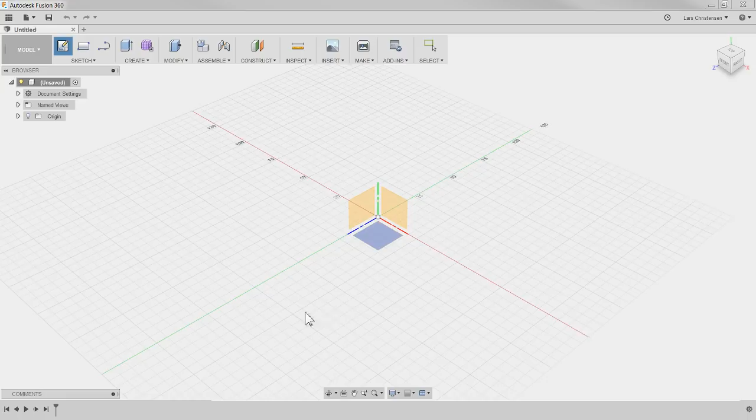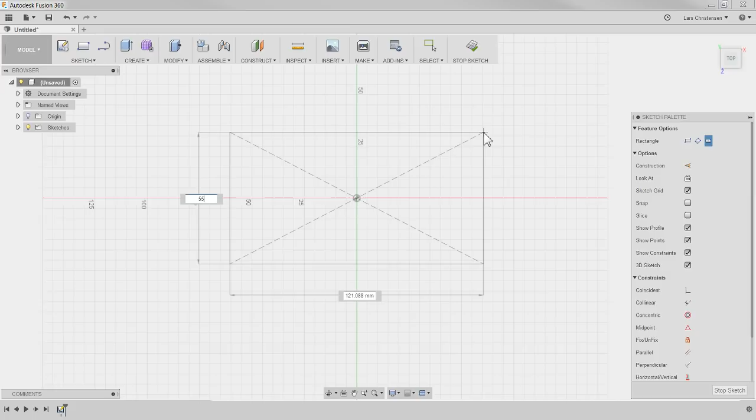So if I go up here and I start a new sketch, I'm going to show a lot in this, so just remember you can rewind and watch more. If I open a sketch on the top plane here, I'm just going to hit the S key and do a center rectangle, and I'm going to place the height and width of this vanity. We're going to do it in millimeters, so we're going to make it 550 wide. I'm going to hit tab, that's going to get me over to the width of it, I'm going to make it 1000 in width. So we kind of made a pretty big rectangle right there, right?

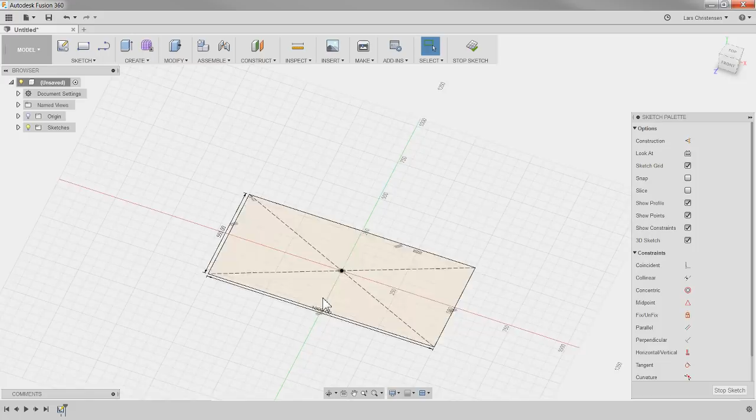So this is kind of like the bottom of the cabinet. Now, with the bottom of the cabinet here kind of drawn up, we could draw up the top of the cabinet. So I'm going to use the offset plane, I'm going to select that top plane, and I'm going to make it 550 tall. Okay, so I made a sketch that had our first rectangle, now we offset the plane here, got this plane. I'm going to right-click, create a sketch on that.

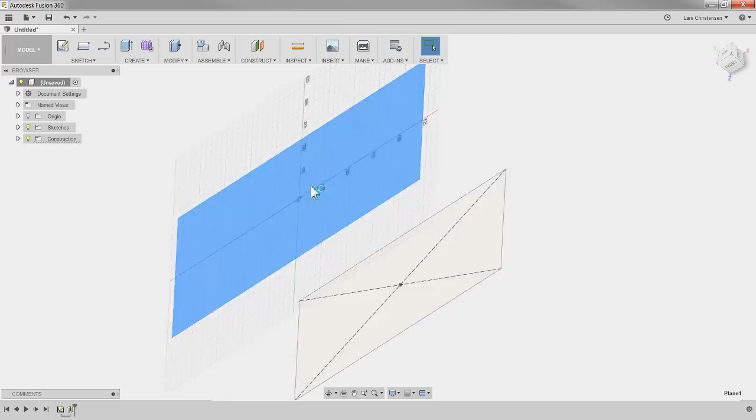And then, remember, we can use that project function, hopefully you hadn't forgotten that from last year. P for project, P for project. And I'm going to select these 4 edges here of our first rectangle, so I'm going to hit OK. And when I spin, right, now you can kind of see this here.

And by the way, this is not isometric, don't forget that you can right-click here, or it's not in perspective - right-click here, perspective with ortho faces. That's what I normally have. So now we kind of see the bottom, we see the top.

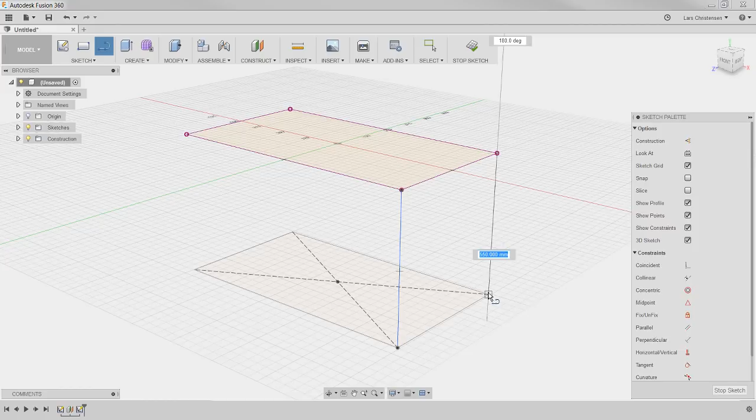Now, if you do want to connect these to kind of make it look somewhat like if you were sketching it up on paper, don't forget, if you turn on 3D sketches over here in this normal sketch dialog, hit L for line, we can actually draw up the sides of this cabinet. Now it starts looking a little bit like what I would be drawing up if I was trying to sketch up a cabinet for somebody, right?

Like if one of you guys came and said, hey, draw something up on a piece of paper, I probably would draw something up like this view right here. So this is kind of like the shape of the cabinet here.

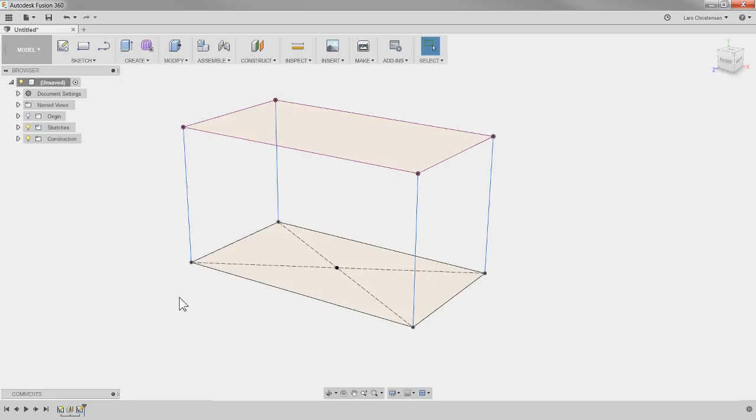Now notice I'm in a standard part file, I haven't done anything over here yet. I'm going to continue laying out this cabinet as I would if I was drawing it up on a piece of paper. Next I want to put in a little door here and a couple of drawers. If I turn my origin on, you can see that's sitting in the center there. We have a couple of different options for how we could get a plane out here we can sketch on.

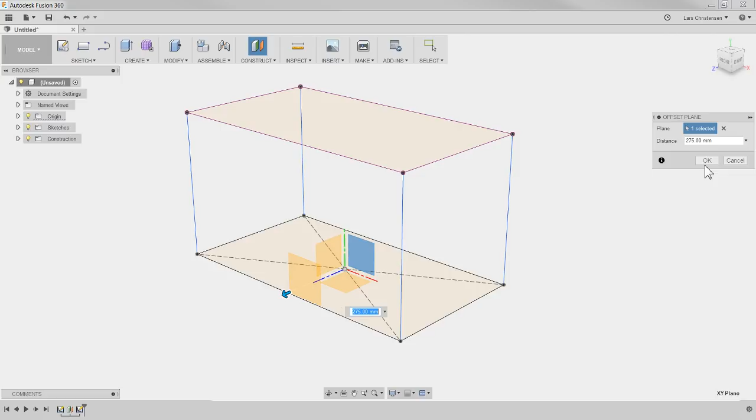One would be to offset a plane, select here, and do the math, whatever that is. But here's one of these tricks: you can also go over here and say measure, measure from that plane right there to that line, and it will put the plane right where that intersection is. Hit measure, measure from the original plane to that edge, and you'll get that plane to that spot. You could also go up to construction and do plane through two edges, selecting the two blue edges. That would have been fine too.

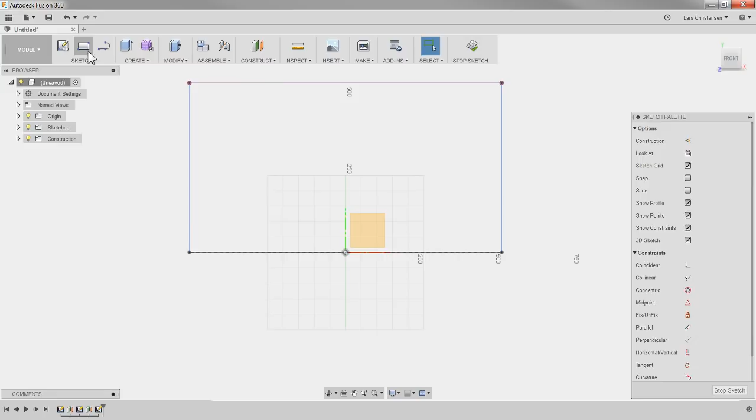But now we have a plane right here we can draw on. So let's start another sketch. Right click, new sketch, it's going to go normal to. First I'm just going to sketch a door, like that.

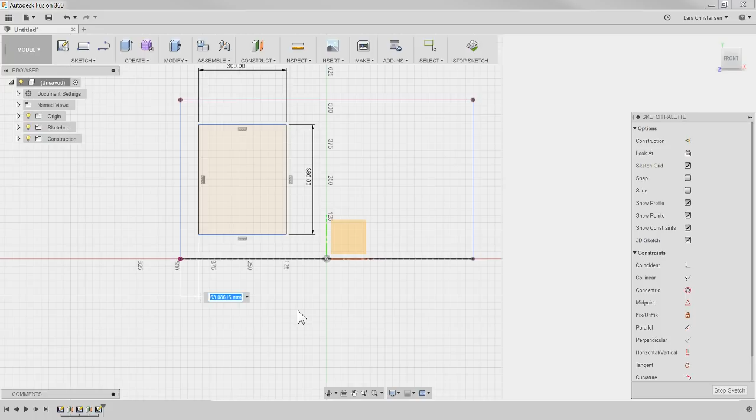Let's put some dimensions on it. I'm going to make it maybe 300 wide, and let's make it 380 tall, just making the numbers up, right? Then we can put some distance from here to this intersection, 75 maybe. And then I want to place it height-wise, we got to fully define it, right?

So we can go in here. Now what is this value? We made it 550 tall minus 380 divided... well, we can't just type that in, right? Don't forget you can do math in here. 550 minus the 380 we made at the gate, close the bracket, and divide that by 2. Now that was 85, place that in the center. Don't forget you can do that. So now that is fully defined.

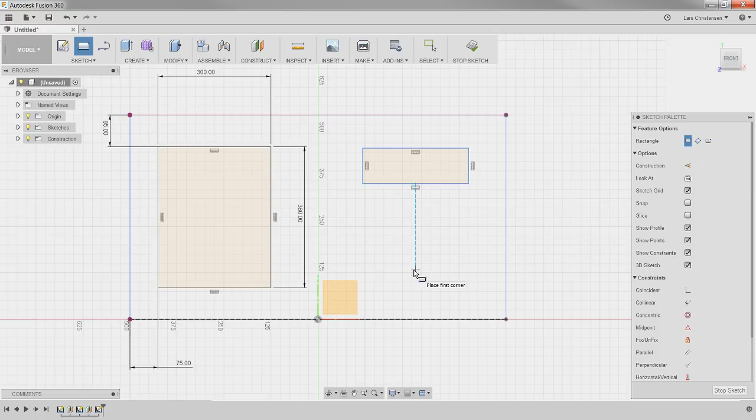Let's create the drawers, go in here, kind of sketch those up. Now these could absolutely be patterned, that may be good. I'm going to do a collinear between here and here because I know I want those to be in the same line. Let's make it 100, let's make it 300 like we did the width of that. And then let's also place this out from here to here.

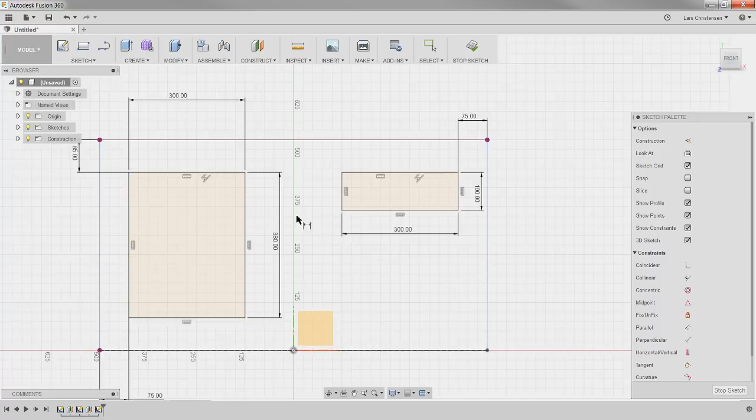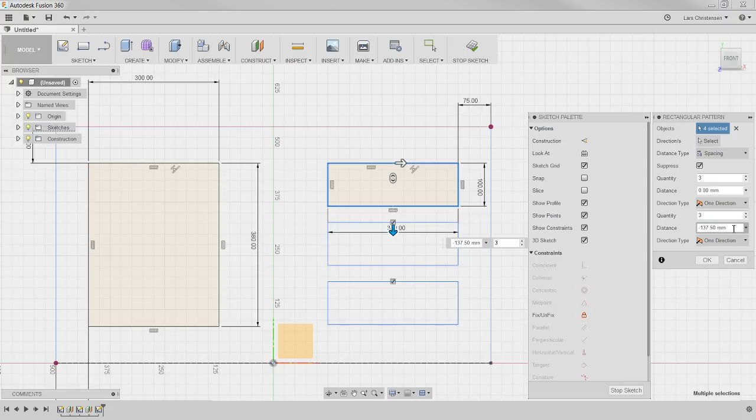75. Then we could choose to use the sketch pattern under sketch and just select those 3 here, or the 4 edges. So now we get those down there. I like to use spacing, and we want 3 of them, and that's fine. Let's make it 137.5 between them maybe. Okay, hit OK. So what we have now, I'm going to end this sketch.

Turn the origin off. What we have right now, drawn up in a couple of different sketches, all in this unsaved document, one document, is kind of my paper drawing.

Okay, so I see a couple of people have some issues. Yeah, well, I'm not the only one, huh? Why two clicks at the end of the line? I'm drawing, two clicks at the end will just end the line. So if I sketch something and double click, it'll end the line. Okay, I hope you guys restart a web browser and your stream is back. I hope we don't, I'm going to get Google Chrome working by tomorrow for sure. Right now I'm just rolling along with Internet Explorer.

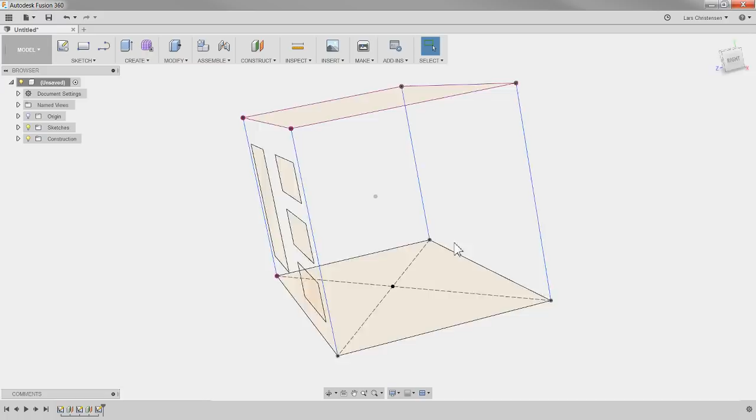Okay, so this is kind of like our paper sketch that you would draw up if you were doing it on a pad of paper. Now the cool thing about this is we can totally now start converting this into models. And this is a really great way to design things like this.

Now, we've talked about this before, but I'm not expecting everybody to be watching every live stream. Now we want to break it into actual components. Right now we just have a bunch of sketches inside of one file. We could continue doing bodies as we've done before, but we want to break it into components, right?

The cabinet is going to be a component, the door that opens up is going to be a component, the drawer is going to be a component. So what I'm going to do is go up here and right click and say new component. And as soon as I do that, you'll see that our icon up here becomes like an assembly icon. Now, here is an important thing.

Name features using slow left click. I'm going to call this one cabinet, because that's what it's going to be, the first one. You will see the cabinet we just created has a little fisheye turned on there.

There's nothing in here right now. If I go back to our top here and turn that fisheye on, that's where the sketch we just created, those three sketches, live. Layout sketch is what I call this, layout sketching, skeleton sketching, master modeling, whatever you want to call it.

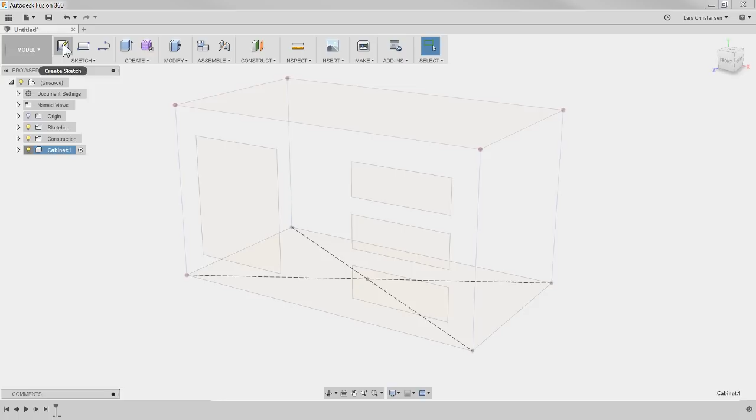So in that cabinet file, I don't have anything right now, so I am going to start a sketch on the same plane we started our original sketch on. Then I'm going to hit P for project.

Now I'm borrowing the edges from that first sketch we created. I'm going to click right here and borrow those 4 edges. I'm going to go one step further, and hit OK. So now in that sketch, I just have those 4 edges.

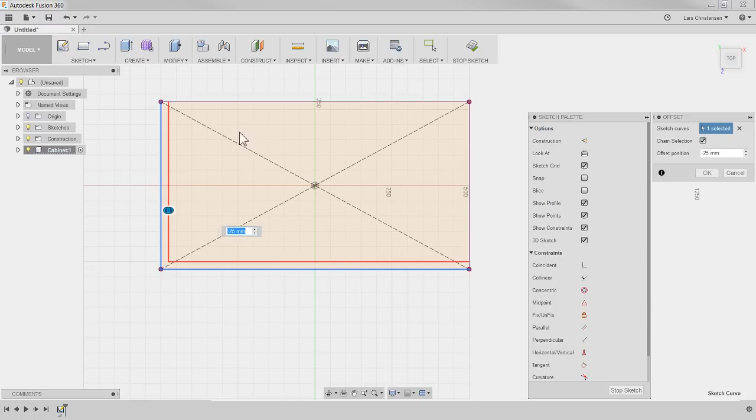I'm actually going to hit O for offset, and I am going to be able to create the thickness of the walls of the cabinet. Let's go in here, now let me just rotate it around.

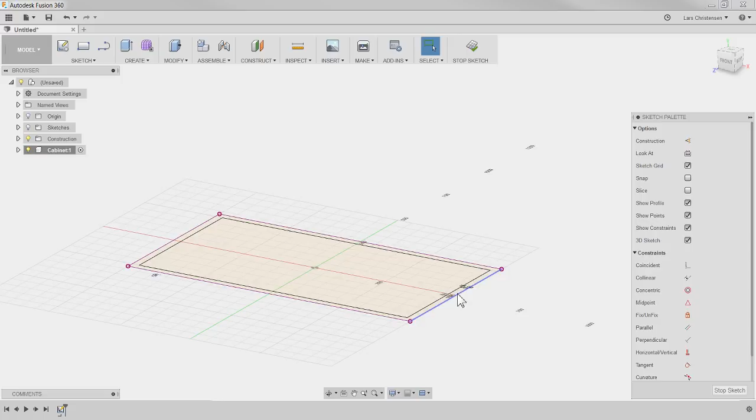Okay, hit OK. So we can still see kind of like the shadow of our master sketch. That one is sitting up here, we can turn that off. So in the cabinet sketch right now, we just have the projected 4 edges and the offset. I hope this makes sense.

Now we can go ahead and extrude that out. So hit Q and extrude. Just going to make sure we select that edge there, right? And we can give that a height.

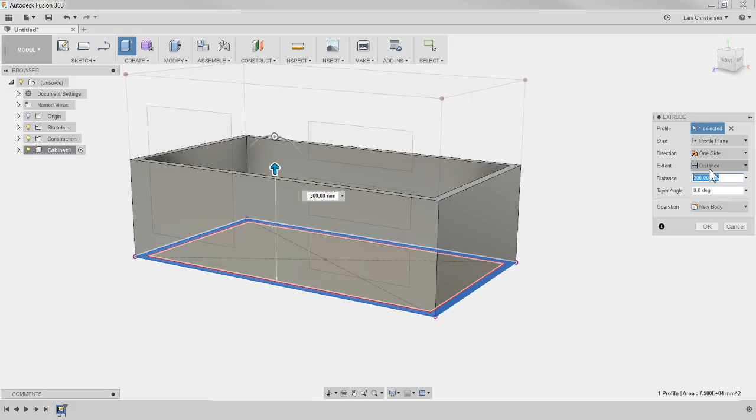Now you remember that I said the height was going to be 550 before, but you could actually go up here and say 'to object', and then select that endpoint right up there. Okay, so that means that now, I'm just going to hit OK.

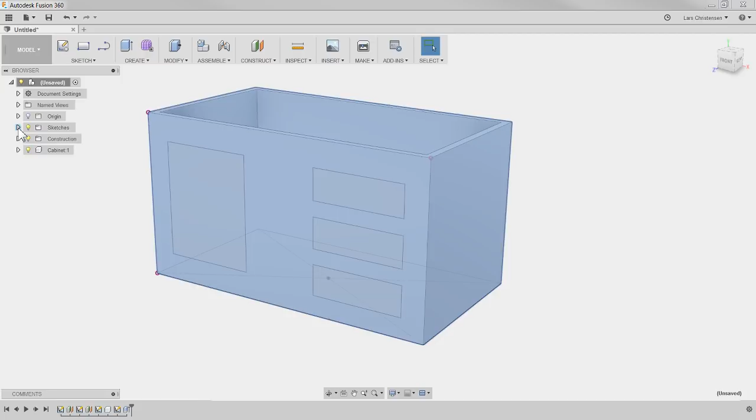We don't have the holes yet for our drawers and anything. But this cabinet right here is totally driven by that first sketch, or the first series of sketches we created. Let me just turn them back on, these first sketches in here.

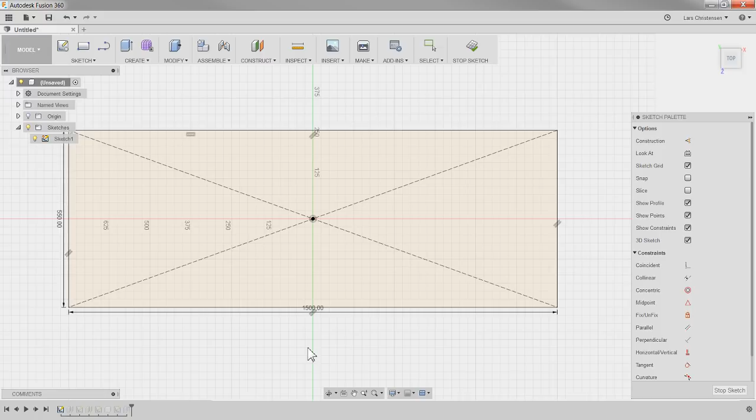What I mean by that is if I go into our first sketch, the very first sketch we created, and change this 1000 to 1500 and hit OK, our cabinet became 1500. And if we go in and change that first plane we created in the beginning to 800, the cabinet becomes 800.

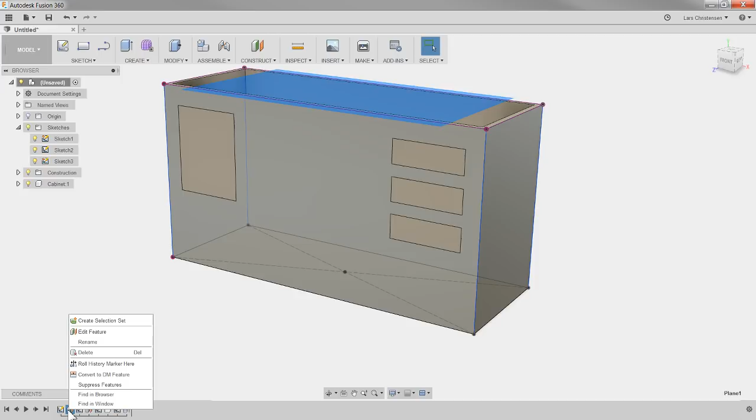I want to talk more about this on the live streams. I want to repeat this: this is what parametric modeling and design kind of means in terms of working with it, that I can change a set of dimensions and other things kind of follow along.

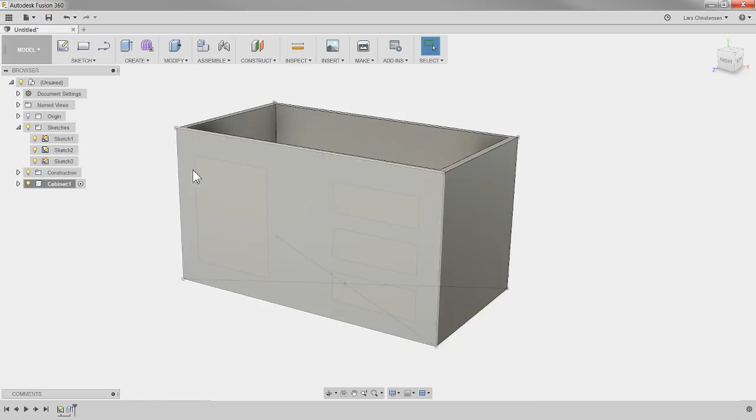Create a sketch, and I can hit P for project, and I can now borrow those other edges we saw before for these different cutouts, for the door and for the rough out for the drawers. Okay, so I've selected all those.

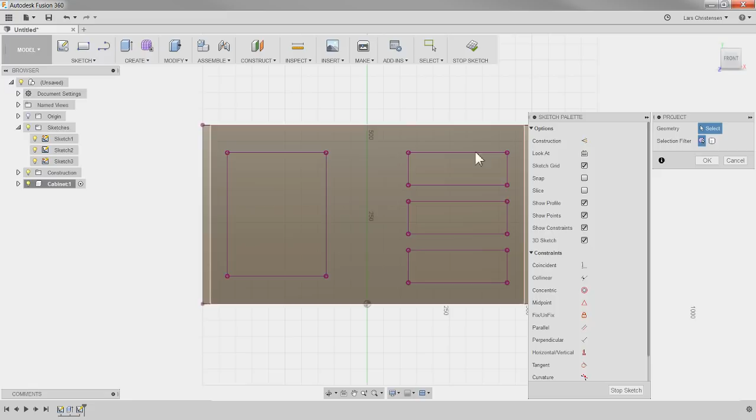Then we can hit Q and select those. And again, I want to cut. If you go that way, it becomes a solid. I'm going to go the other way, it's going to be a cutout.

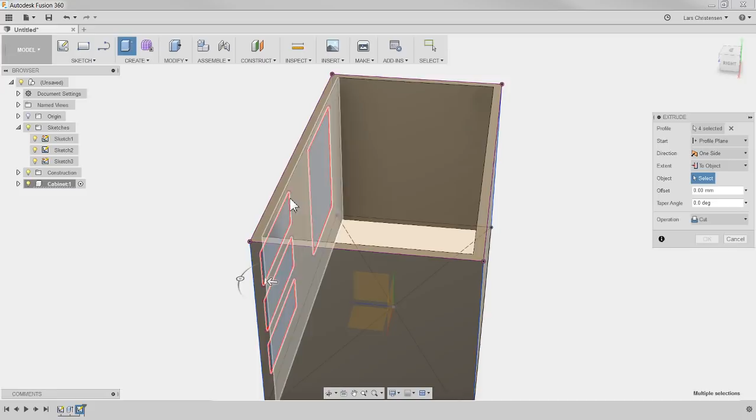Of course, I don't just want to leave it at some weird distance. I'm going to say 'up to object' and select the back edge, the back side of the cabinet. Okay, so that means that now if we went back to the first sketch in this cabinet and changed the offset value, the thickness, everything will follow along.

So just like this, we have created our first component in this one here. Now let's just move on.

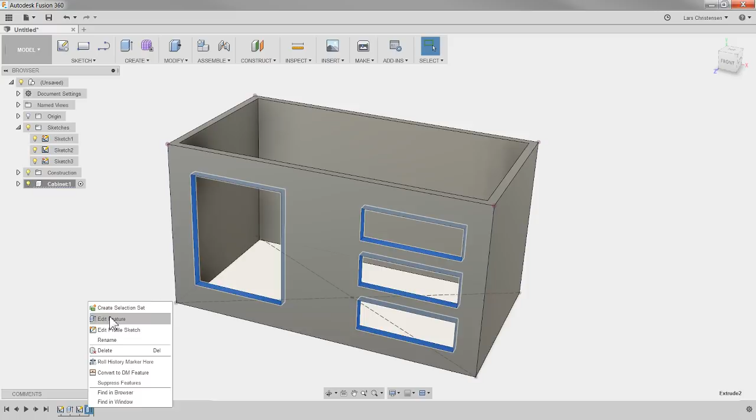How did you select the other borders and apply the same thickness? I literally just selected them all within that one command. If I go in and hit edit, you'll see I had four selected. I didn't control-select, I just click, click, click, click. If I hit the little X up here, I select that area, that area, that area, that area - just one left click per item.

Okay, I'm going to move on here because I want to show you some pretty cool stuff. So this is kind of like the foundation of our cabinet, and we've already established that this is controlled by our sketches here, our skeleton we created that is sitting up under the first one. Now we need more objects here.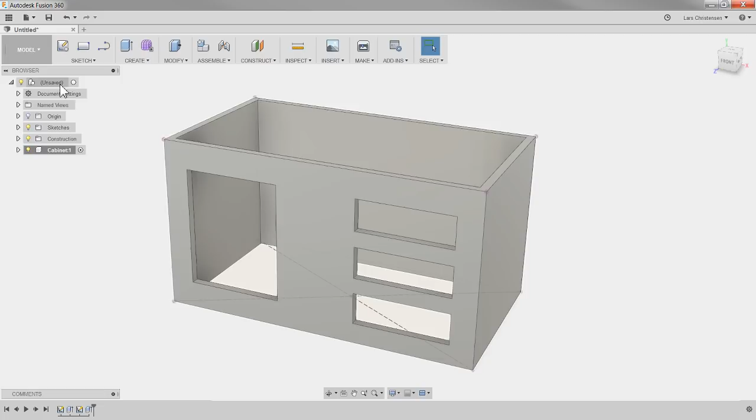Let's create a door for this - is that what you call it, a door? I don't know. So I'm going to right click up on our top component here, and say new component. I'm going to slow left-click, that's how we can rename it. If you don't get in the habit of renaming this stuff, you just get lost, right? So this is the door.

Now again, just like with the cabinet, there's nothing in this file right now. I just created it. There's nothing - see down here in the history line?

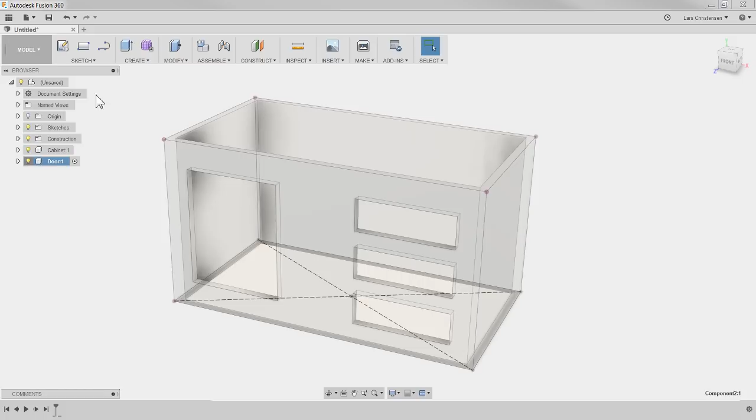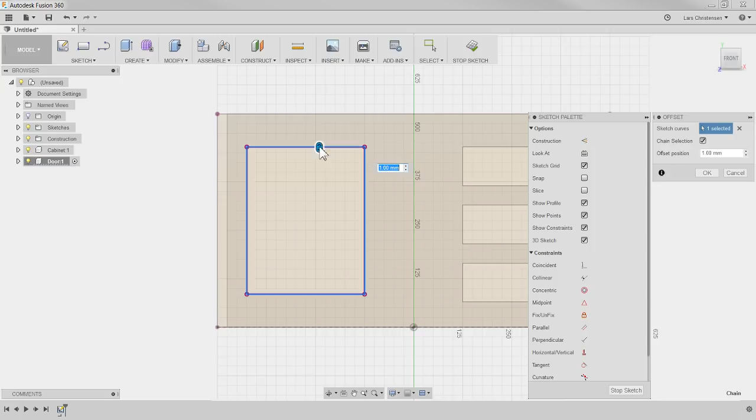Completely flat, right? Now I'm going to do what we did before. I'm going to open a new sketch, start on that face, and again borrow - I like to say steal - those edges we already have established here. But the door is going to be bigger than this, so I'm going to hit O for offset, select this, and offset it out a little bit. Whatever, right? So now it's a little bit bigger here.

Q, and now if I select these two areas here, I can add some thickness to this. So now if I go back up and turn this on, we now have the cabinet, we have the door right here, and still remember everything is controlled by these sketches.

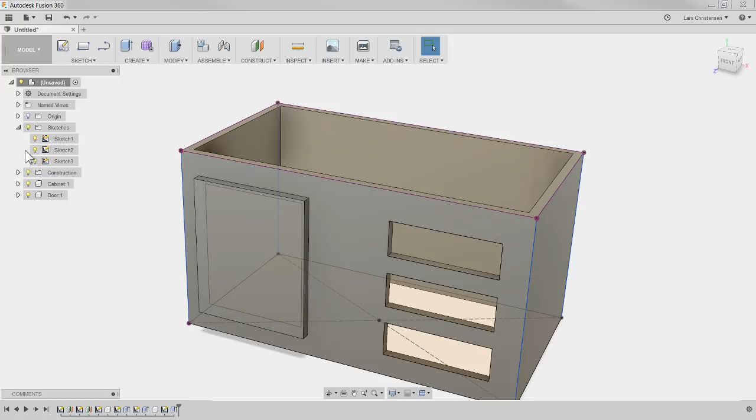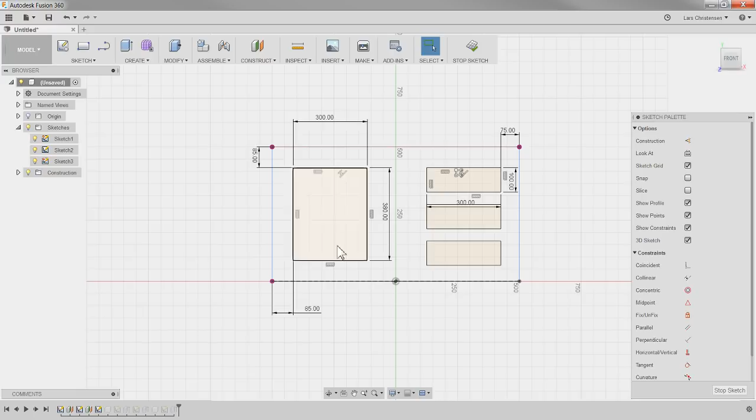So if we decided we were going to go into the first sketch and change the distance of the location - if we decided we were going to make this one 85 of this, move that over a little bit because the customer calls you up and says we're going to change that - because everything else is derived on that, it moves along. All the other things follow because it follows that. Okay, so I hope that kind of makes sense.

Now, a couple of important steps to move on - when we create new components, they float in space. I'm going to just do a little undo to get them back again.

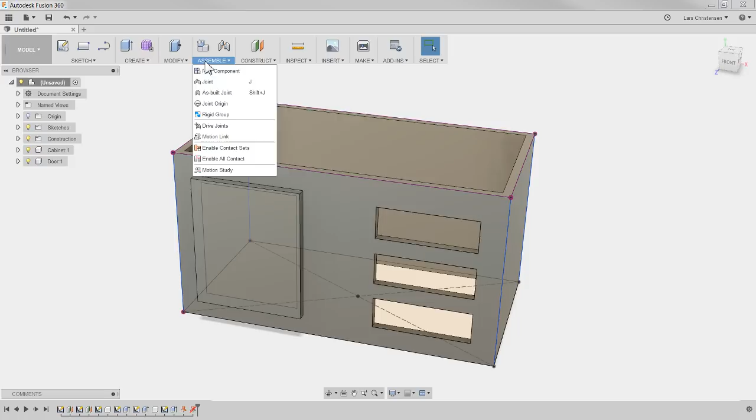Okay, that's extremely important. Now you have two options, so I'm going to decide that the cabinet is on the floor and is not moving. You got to decide that one of the components will not move. So at the cabinet, you can either right click one of the components and say ground, and that just puts a thumb tack in it here. I'm going to unground it again. You can also go up and use this 'as-built joint'.

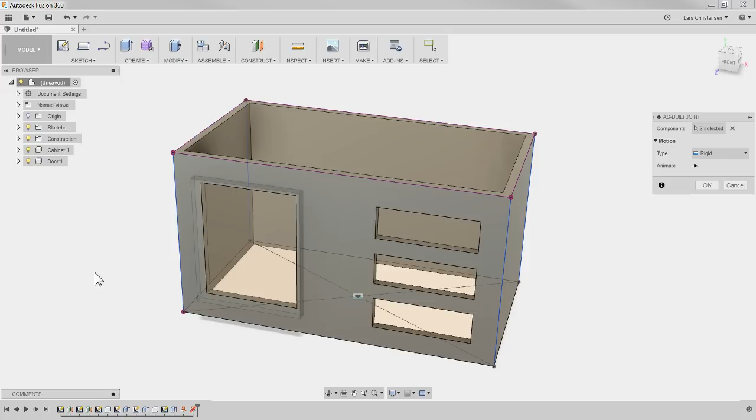And if you do that - use as-built joint and select the cabinet with our top assembly - then we're actually aligning, and we have rigid turned on over here. We're actually aligning the two origins together. It kind of does the same thing as grounding it. I'm not sure, but I think most people would say that's better practice, what we just did using this as-built joint. Now this cabinet is not moving.

It's grounded. The door, though, is still moving. Well, we can use that as-built joint continuing. So I'm going to go back in here and say as-built joint - I'm not even pronouncing it correctly - and I'm going to select the cabinet and the door. But I don't want it to be rigid, I want the door to be able to move, right?

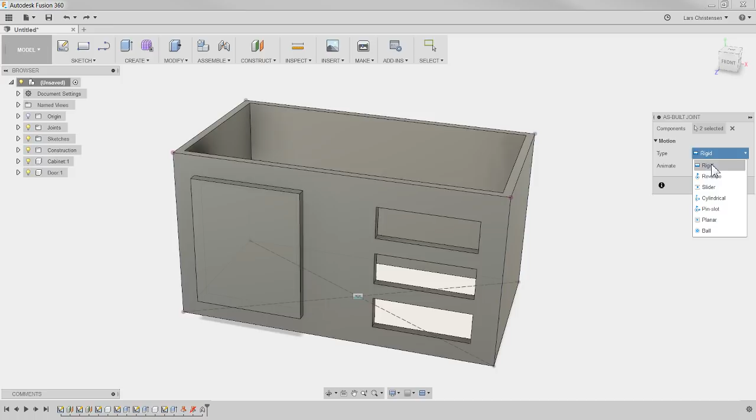So you can go over here and say, well, what do I want to select out of this that I want that door to do? I want it to revolute. So I'm going to select revolute. Then it's looking for a position to revolute around.

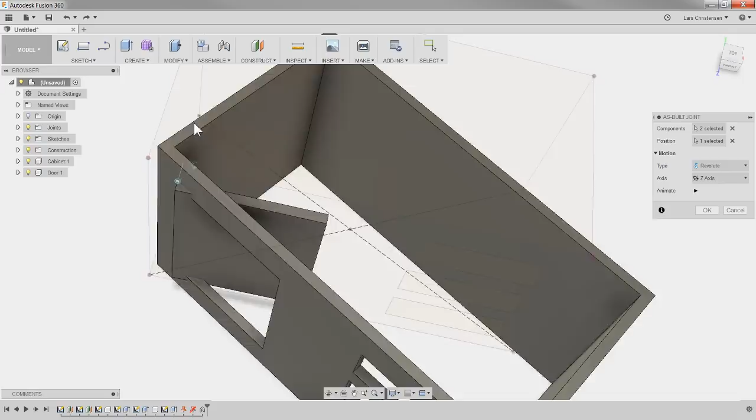As I'm zooming in, you'll see this little flag appears, and this is the corner where I want it to revolute around. Of course, the cabinet spins around right now, not the door. That's okay if I hit the play button. Don't worry about that. That's just because right now Fusion is just showing you the movement, not necessarily how things was built. So I'm going to hit OK to that.

And what we now have is that door moving. Now, that door is some kind of magic, right? Because it just spins around. It's close.

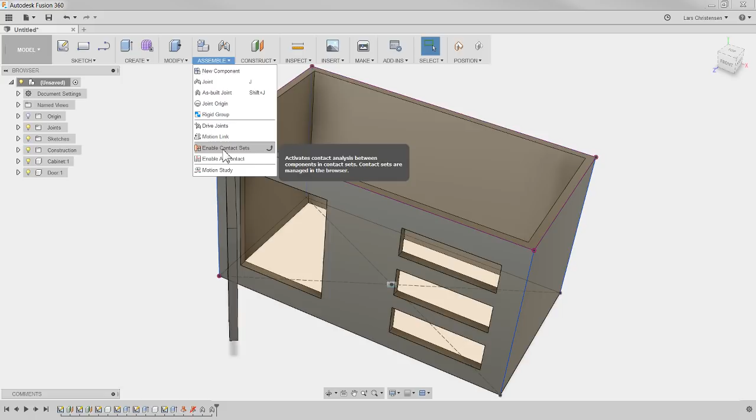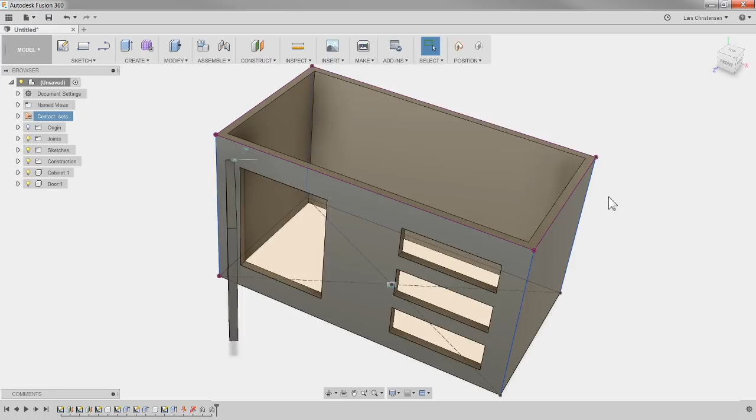Now we have something up here under Assemble called contact sets. You can enable contact sets. Contact sets means that we are saying what can touch it, what is going to hit each other or not. So I'm going to right click on contact set, new contact set, and select bodies or components. I'm going to select the cabinet and the door and hit OK. And now it will stop. It will literally just open up like this.

Now, I know some of you guys are like, okay, you're talking about magic? Don't you think it needs a hinge? Yes, absolutely. If I was going to continue modeling this up and make it look real, I would add the hinges. We've done that before in other live streams. We made the box where we went up to McMaster and downloaded hinges and installed that with all the movements. So you can definitely check out that live stream. That live stream was modeled the way you want. So if you search that one, yes.

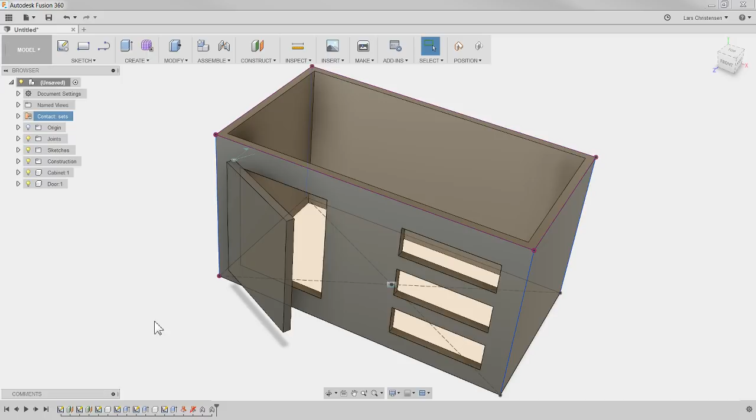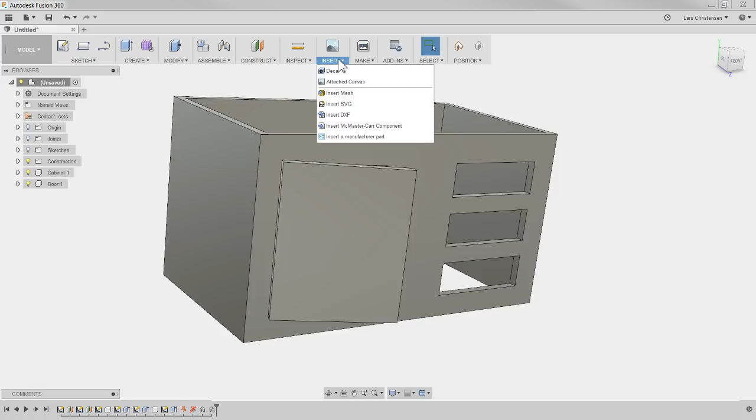But this here is actually pretty great as a concept stage, right? I'm just kind of still proving things out for my customer here to make sure that we are all on the same page here. So this door is going to open up and down. Like I said, yes, you can absolutely go to McMaster and download the hardware and stuff like that.

Now, I know I'm going to be running out of time, so I just want to wrap this up because I really wanted to show as much as I could. So I'm going to go ahead and do one of the drawers also. So actually, hang on a second.

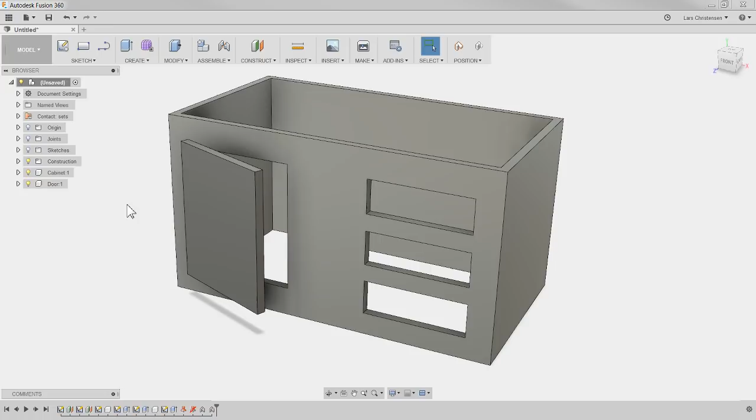Let's right click and hit appearances. I just realized that a lot of the guys who are in here are probably woodworkers. You're probably hurting yourself by watching this being modeled out of steel. That's better. Okay, whew, much better. So now we have some wood here.

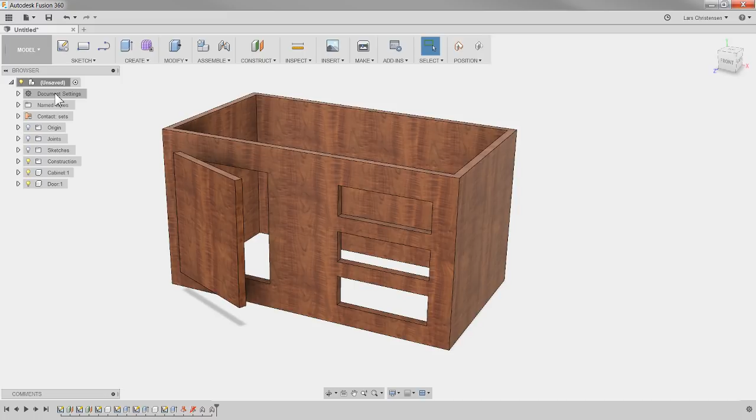Now let's go ahead and do one of the drawers. I'm going to do the same thing as I did before. Repetition is key in all learning. Right click, new component, slow left click. I'm going to call this one drawer, I think that's how you spell it. I'm going to do what I did before. I'm going to open up a sketch right on that face right there.

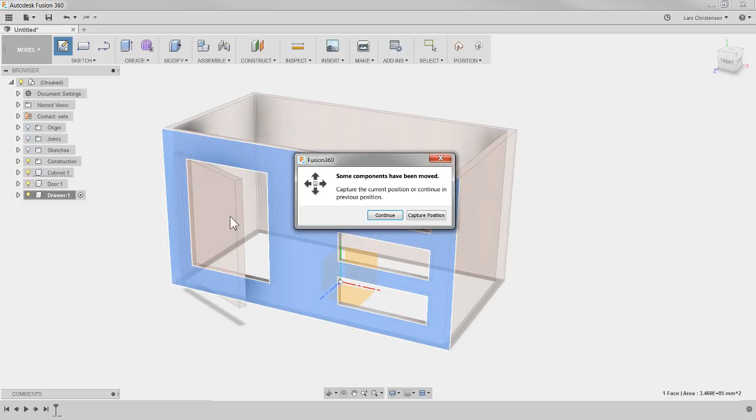Now right now it's looking to capture the position. That's because I left that door open. I'm going to just close that. Doesn't really matter. I'm going to do what I did before. P for project, and I'm going to project these edges here, right? So now again, if we move the drawers around, the location, everything will move with it.

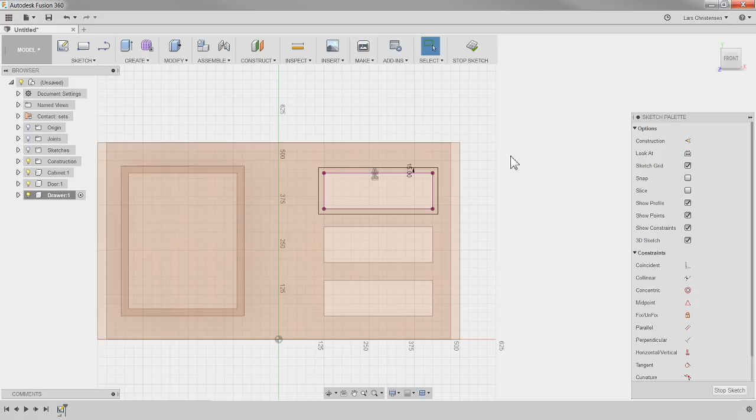I'm going to hit O for offset. So again, it's going to make the drawer a little bit bigger. Let's make this like that. I'm going to do exactly what I did before. Q, and select these two areas here. And I can now make the thickness of the drawer. Okay, so that's kind of like the front of the drawer here.

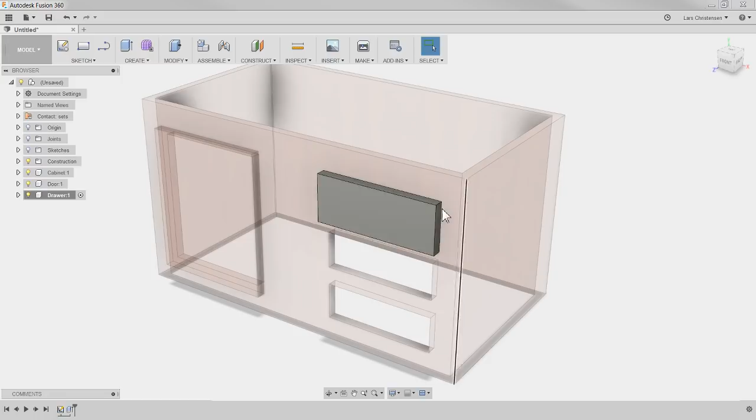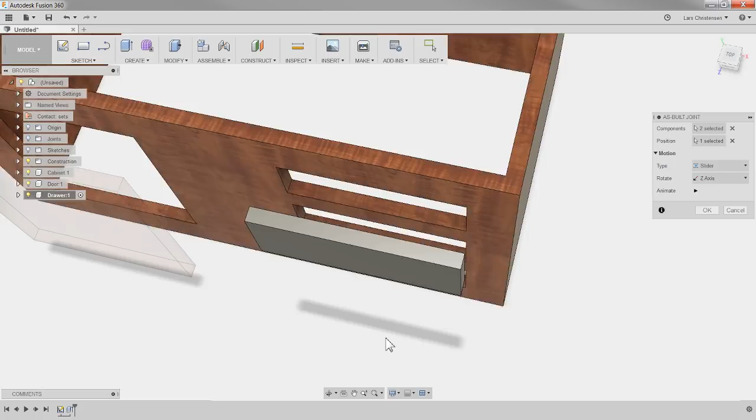Now, don't forget, that thing is also floating around, not what I want. So we can again go in and say assemble, as-built joint. I'm going to select the cabinet again because that's the one we grounded. The drawer, this one though, I don't want to revolute. No, we want this one to slide, right? So now I can go in with the slider and add a slide to this drawer and hit OK to that. So now you will see that the drawer can slide back and forth just like you want.

Again, you're like, well, wait a minute, it hits the part. We're going to do another contact set. Right click, new contact set, drawer, cabinet. OK, now it goes out and now it hits and it can't go any further. Oops, well, it can if you pull it the wrong way. Also be aware that you can actually go over to the joints.

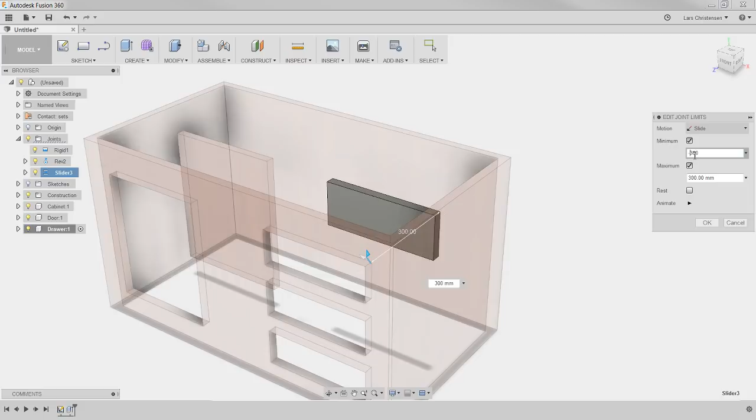And in here, you can right click and say edit joint limits. And we can actually go in here. I'm just going to make sure I get this right. Turn a minimum and a maximum. So maybe we want this to be, this is something that I sometimes get a little bit confused about. Let's see here. 300, minus 300.

Hang on, there's something goofy with that one. It goes right through—maybe it's because I'm up here.

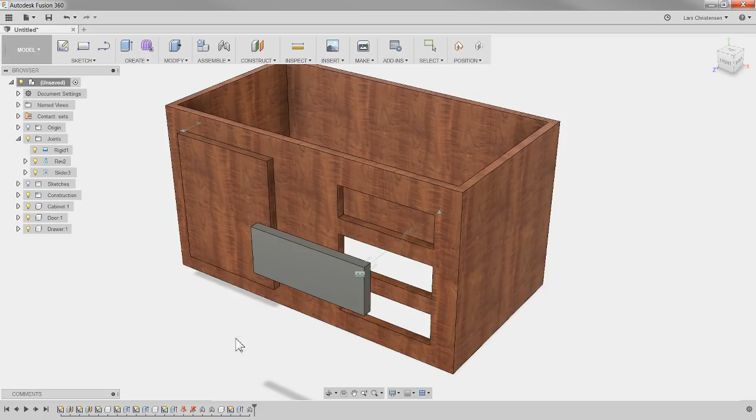Now you'll see it hits and closes just like the draw here. A couple of things—that's a metal draw, so that's not going to work. Let's just drag that over to there.

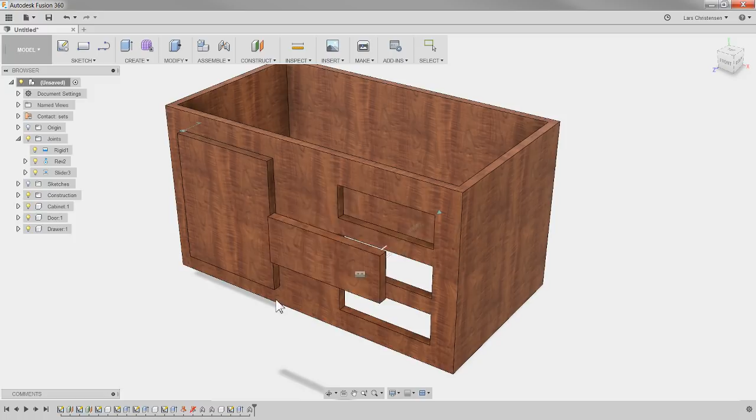I want to show you one more thing, because this drawer component is only the front here. If I showed that to the customer, they'd laugh at me and say, dude, that's an empty drawer. So there's more to this drawer than just the front plate.

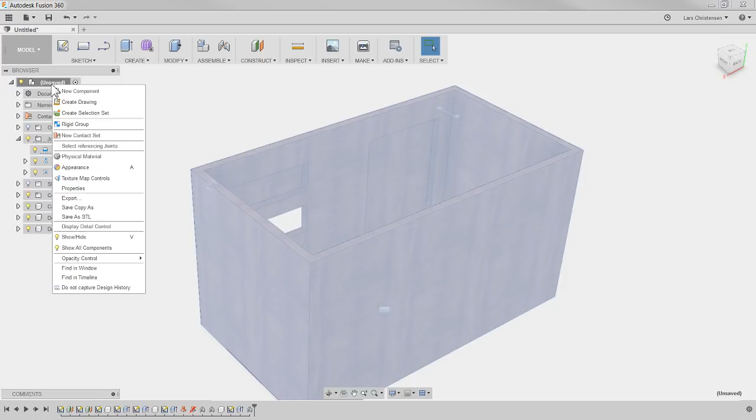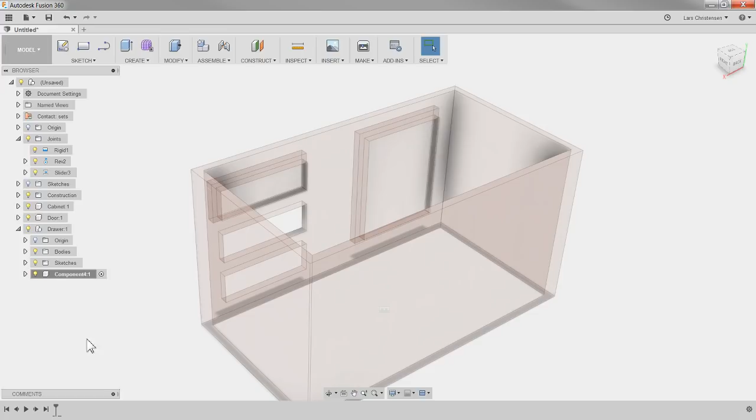There's other stuff, so what we could do is create new components by going up here, right click, and set new component. We can also go down to the drawer, make that active, right click, and say new component. Now suddenly the drawer became a sub-assembly, with components inside of it. So now we could open a new sketch with that.

I'm running out of time. Select the back of the drawer and hit P to project again, and we could borrow this inside edge right there. O for offset—let's give it a little thickness to the inside of this one, minus 10.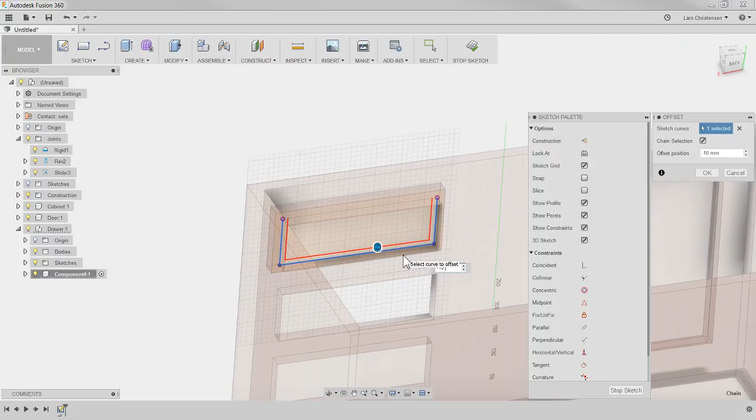Almost wrapping up here, folks. Hit offset line and close these two off. Q, and now we can make the drawer here. We made it open 300, so it's probably going to go at least 320 long.

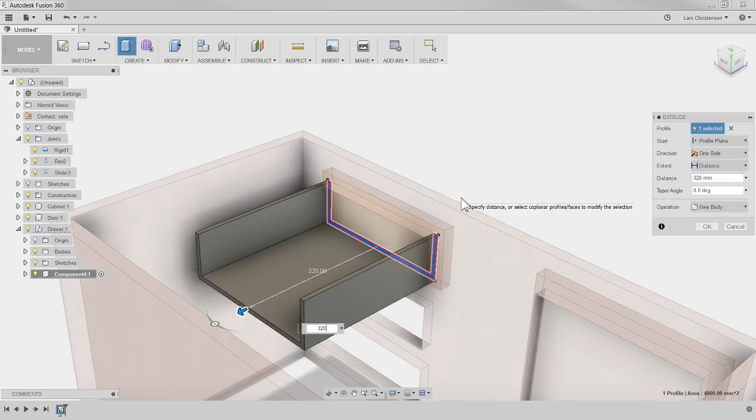So now we're working within that drawer, working with these as a sub-assembly. Let's create the back here too—that's probably going to be another component within that, the back. So this would be, I don't know what you'd call it, bottom and side.

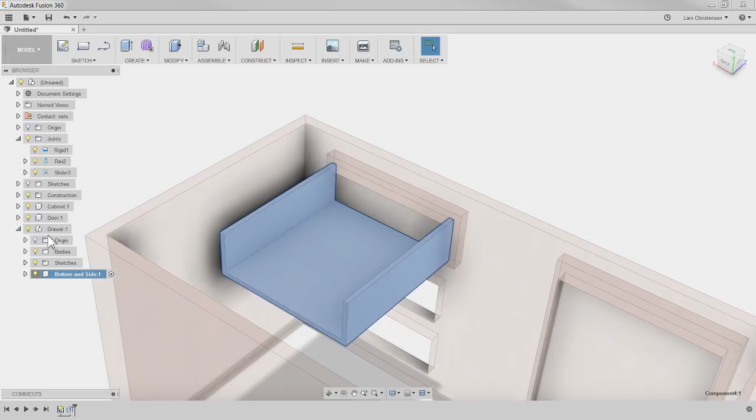I really recommend you get in the habit of renaming these, because if you don't, you can really get yourself in trouble trying to find things later.

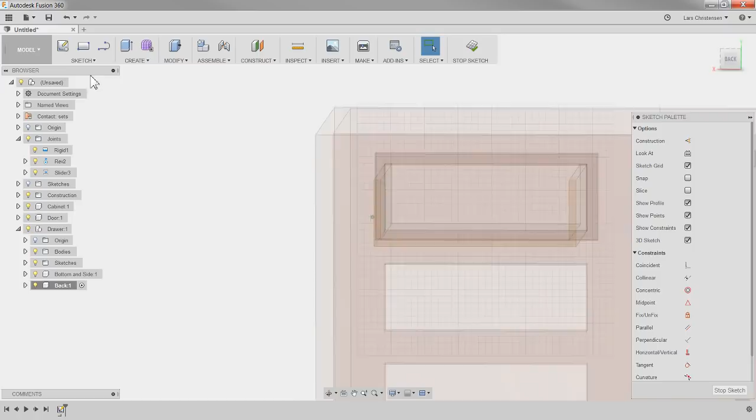So let's make that one active, go in here, start a new sketch on that backside, and wrap this up by dragging a rectangle from here down to here, then extrude some thickness out—let's go 10.

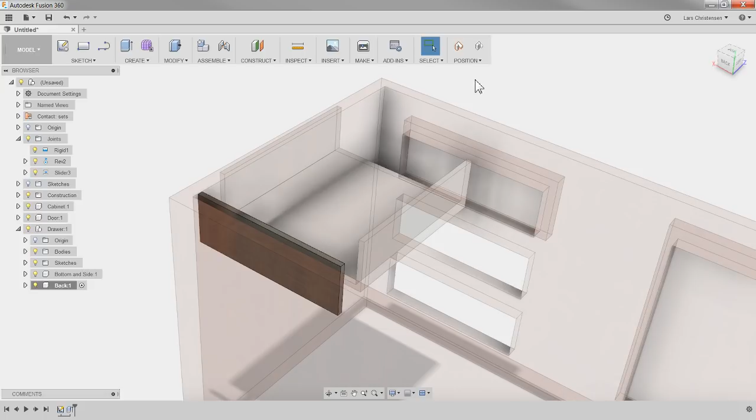Now we kind of have that put together there. Before I wrap this up, these are still moving around—I never got these in place.

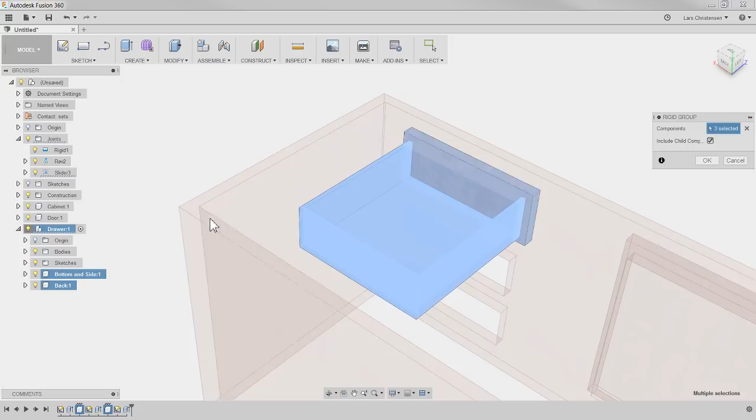You could do an as-built joint. You could also, for this drawer we created, use a rigid group. If you're using rigid group, you select those three components in here, including the child components, and it will follow that first as-built joint we did there.

And now we have that drawer there. Let's go back to the top, and in appearances, drag that over on top of that so it all becomes oak.

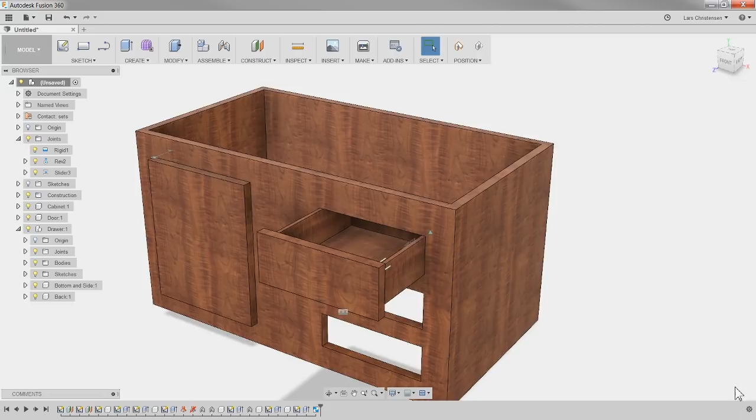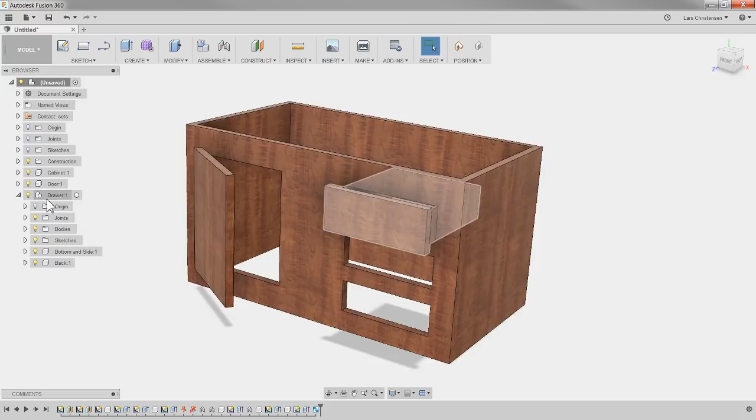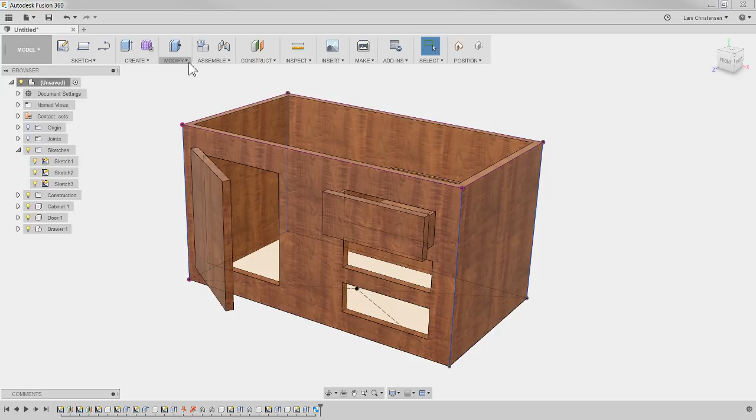I really hope this showed you how you could model all this up as components, how you could go in, and it's all driven from those first 3 sketches created at the beginning. We could probably continue working with this next week, because we could start talking about how detailed we want to be. Another interesting thing would be adding parameters to this, so we could drive it all with parameters.